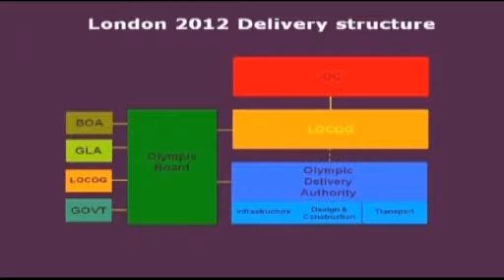The oversight of LOCOG and the ODA is by the Olympic Board. Its members include government ministers from the DCMS, Department for Culture, Media and Sport, as well as Seb Coe, the Mayor of London, and Lord Moynihan, who represents the British Olympic Association. In summary, LOCOG put on the show, we build the theatre, and the BOA provide the British team, and we act as hosts to the competing countries and their athletes.

So now let's move on to the particular activities of the ODA, the body I've been involved with since 2007. We are an NDPB, a non-departmental public body, responsible to the Secretary of State at DCMS, Culture, Media and Sport. We're there to deliver the infrastructure, the venues, the athletes' village, the transport infrastructure, and to devise and implement an effective transport plan—all, of course, to time and cost, but also in a sustainable manner, and most importantly, to leave a lasting legacy.

An early decision that had to be made was the extent to which the ODA would try to do all this itself, or whether it would seek help. The decision was made that, well, we're a limited life body.

It's going to be very difficult to put together a team of 700 people to do this from scratch with no long-term future for those individuals. So the decision was made to appoint a delivery partner.

To try and ensure the overall programme, it was split into 6 phases, as shown on here. It was also described as the 2-4-1 policy.

2 years to plan it, 4 years to build, design and build, and 1 year for fit out by LOCOG and the events trials.

The early stage focused on determining the location of the various venues, their outline design, submitting a huge planning application. We submitted that largely to ourselves because the ODA had been given planning powers, something I recommend to anybody undertaking a project of this nature.

But in order to take it forward in the best of spirit, we actually created a planning committee which involved the local boroughs, and whilst we chaired it, the local boroughs had all the say that they would normally expect to have in any normal planning process.

In fact, we've never actually used the ultimate powers that we have had, and I guess that to a degree is clearly a credit to Lorraine Baldry, who's been the chair of that committee.

At the same time as that was going on, the LDA used its compulsory acquisition powers to assemble the site. So we didn't have to assemble the site, the LDA did it for us, and they had to provide compensation to approximately 100 companies, who had to be moved off to new locations.

In addition, there were 3 groups of travellers who also had to be provided with new campsites in the area, off-site. For me, that was a learning experience that shows that travellers don't like travelling.

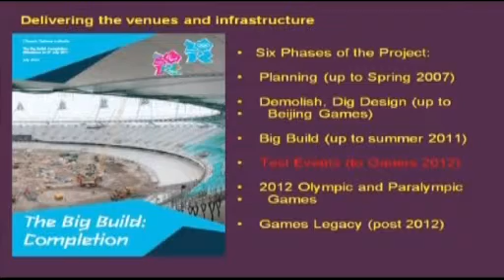This phase, 3 years, then leaving the year of planning at the end for the fourth phase of testing, and then that obviously followed by the transformation to legacy after the Games.

Engineering works really commenced in the demolish, dig and design phase, and the Stratford site, which we can see here roughly at that time, is surrounded by the Lee Navigation Canal running down the west.

You've got the A12 dual carriageway running across the top. You've got the railway line which comes out of Liverpool Street, the Eastern Line running round here, past through Stratford International Station, going round there.

You've got the Channel Tunnel Rail Link running right through the middle with Stratford International here. And not easily seen on here, but across the project, you can see one there.

There were actually 52 pylons crossing the site carrying National Grid power cables. So one of our first tasks was to actually get rid of those cables and get the whole lot out of the way and underground.

And we built 2 6-kilometre long tunnels under the park, and that project in itself was £300 million of just straightforward enabling works. The site had been used for all sorts of industrial use over a period of a couple of hundred years.

You'd had early Bakelite industry there, early plastics took place there, and more latterly, of course, you had your fridge mountains and your car breaking yards. You had some rail facilities still here, stabling yards, which we had to rebuild to the north of the site. And all this soil that you can see here was soil which came out of the tunnels of the Channel Tunnel Rail Link. So again, the site had been used simply to dump soil on it. So it was very heavily contaminated with heavy metals, petrocarbons, arsenic, and so on.

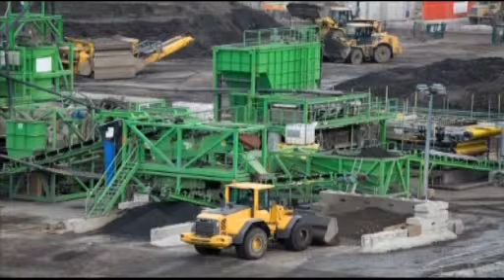And this was just one of 5 soil washing plants which were introduced to clean and recover the contaminated soil. And 2 million tonnes went through these, and we in fact recovered 95% of the soil. 5% went off to landfill. Contaminants stick to the finest grains within the soil, so you're left with a sort of cake at the end of the day, which can just go off to landfill. At peak, we had about 60 laboratory technicians just testing hundreds of samples every day. But the result was that we were able to reuse all that material for backfill, drainage, embankments, and so on.

I mentioned 200 buildings which were on the site earlier. They all were demolished, and again we recovered and recycled 90% of the material there, some of which then went into the construction phase, such as lots of granite curbstones and hardcore brick slabs, and other buildings which were actually taken down piece by piece and sold and shipped off to other locations.

The River Lee runs right through the centre of the park and clearly had the potential to be a key attraction. However, it's tidal, and at low tide you expose the mud banks, and of course in amongst the mud banks you had the shopping trolleys, the old bikes and everything else. And indeed one day they found the remains of a car. Inside the car was a safe. So much excitement whilst the oxyacetylene was delivered, and the safe was cut open to find nothing inside it.

A whole series of bridges, 35 bridges have been built across the site. Mostly they are composite steel concrete deck structures, but quite a lot have been built in two parts. And here you can see very much the two parts of the bridge, a permanent part and a temporary part. In fact, if I get this the right way around, I'm pretty sure that the permanent one is this one.

And this one here gets lifted out after the games because we just don't need bridges that wide in legacy use. You do need them for the massive number of people which are in the park during the games. So all of these bridges pretty well are built in two parts.

So let's now have a look at some of the stadia. And of course, a starting point for any games is to determine the extent to which the existing facilities that you have in the country or in the city can be used. To the extent that they're not suitable, then the next decision is, should we build a temporary venue? Or is there justification for a new permanent venue? And that decision process went through for each and every venue.

The main stadium was a significant challenge in this respect. You need 80,000 capacity for the opening ceremony and for the main athletics events. For the UK, 80,000 seats, that's only going to be of interest for a national football stadium or for one or two of the Premiership clubs who can utilise a capacity like that.

Wembley could have been adopted. Many people say, why didn't we go to Wembley? And fundamentally, security and transport, moving hundreds of athletes up to Wembley and back each day, separating them from the main Olympic village and park, basically made that a non-starter.

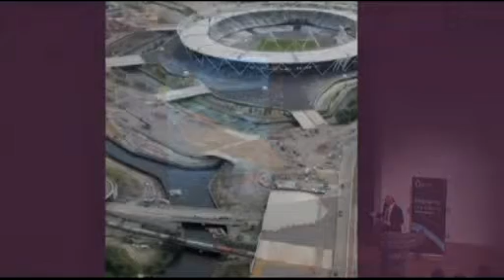So a decision was made in 2007, probably for the first time, we think, that we would build an 80,000 seat stadium for the Games, which could then be demounted to a 25,000 seat facility, so reducing the risk of having a white elephant after the Games. We used the natural fall of the land at this end of the stadium. We basically went in at ground level and we just used the land to put in a 25,000 seat lower bowl, and then above that we put in the extra 55,000.

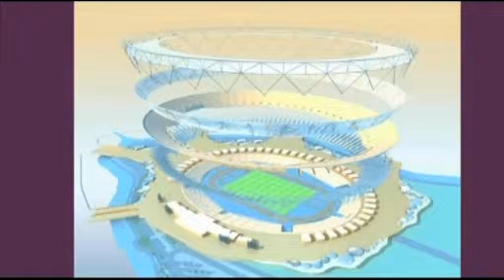And here you can see the stadium blown up. You've got this lower bowl of 25,000 seats. You've then got 55,000 seats contained in a structural steel frame, and then separately another structure holds up the roof here. These tubular steel beams we've got around the top, those are recovered gas main pipes from a project which ordered too many gas main pipes. So that was quite handy.

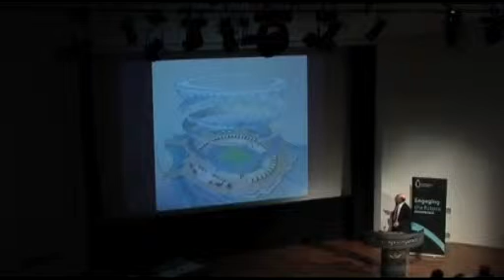The torsional ring on the inside here, which holds up the inside of the fabric roof, is also stressed to 1,200 tons, and that is capable of carrying, and is carrying, 34 14-ton lighting towers on top of it. The bolted steel structure can just be very easily assembled and dismantled.

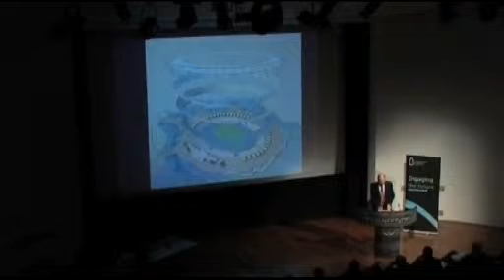Although, of course, since its completion, when Gordon Brown came to visit us, he walked across the bridge onto the stadium, and his first words to me were, "You're not going to take this down, are you?" And now, of course, we've got various football clubs, or have had, fighting over its use in Legacy, and almost certainly at the moment, I suspect, it will not come down.

We've now won the 2017 World Athletics Championships, although you don't need 80,000 for that. But that certainly has assured the future of the stadium, and almost certainly now I think it will be somewhere between 60 and 80,000 in Legacy.

There are 700 separate spaces underneath the stadium around here. One of the key things to notice here is that in trying to make it very simple as a structure, these, what I call the Smarties, around the perimeter here, are actually the sort of retail and catering units that normally you would have inside a stadium. We pulled all of that out in order to make the stadium as simple as possible. So these would all be temporary facilities on the concourse level around the outside of the stadium, really fundamentally driven by that desire for simplicity.

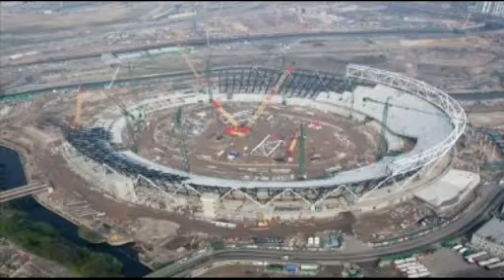I think that's it during construction, which shows it very clearly. The steel frame, and precast concrete going on for the seating. You can see the structure for the roof separate, so the white steel basically separate from the black, and it went extremely well as a facility. And then you can see the lighting towers which have been put on the torsion ring on the inside.

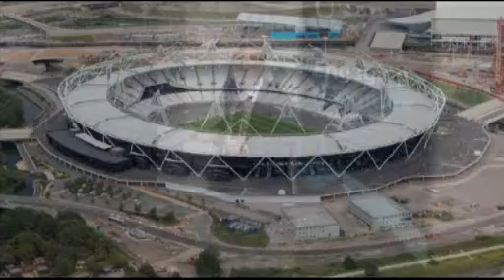The zigzag design here is a sort of breakdown of the Olympic logo with its sort of haphazard shapes, if you like, and you can see they've even tried to follow that through in the alignment of the asphalt on the outside. The IOC, of course, always get something different, so they've got their box here, which is basically the hospitality suite for the IOC and the officials from around the world. So that's the main stadium.

The aquatic centre featured at bid stage as an example of what we could do in terms of iconic buildings for the Games. And so an iconic design by Zaha Hadid was introduced to the bid document to capture the imagination. The great thing about iconic designs by iconic architects is that some poor bugger's got to then build it. And this one was no exception.

So post-award, it was realised that what was designed was a bit too big for legacy requirements, so it was decided to scale down the original design, and consequently the core legacy building has a capacity of 3,000 spectators, and that's increased during games time to 17,500 with the addition of two very large wings on either side. Inside it, you've got a 50-metre competition pool, a 50-metre warm-up pool, and a dive pool. It's worth remembering that there is not an Olympic dive pool in London today, so the divers go to Sheffield to train.

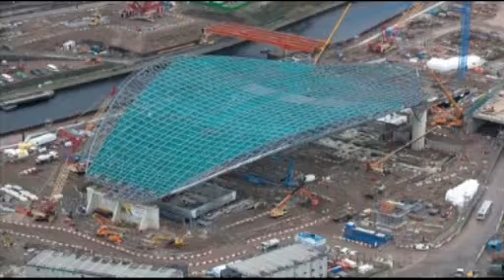But that is actually the floating end of the roof in Legacy, so that had to be fixed and built away from, with temporary stands running through to support it as it was bolted together. It's a bolted structure. And then once it was finished, we had to jack the whole thing up in the air to put the sliding bearings in under here, and at the same time remove the temporary support. So that was an anxious moment. It was done on a Saturday and Sunday when nobody was around. I stayed at home and simply suggested that the design engineer should sit under it whilst it was being done.

But it settled to within just a few millimetres. It was all done with a laptop. So a laptop controlling all these jacks, lifting the whole thing up, and then on the laptop they could see 200 points around that roof and what position each of those 200 points was taking up. And it took up all the positions to within a few mil of what had been designed. So an enormous credit to the designers who, not surprisingly, were Ove Arup.

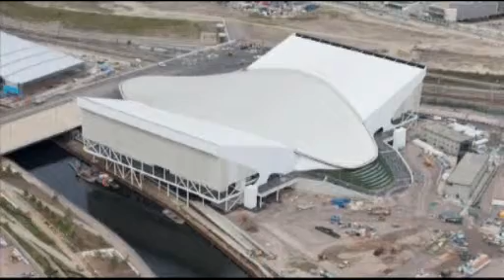I mentioned the two temporary wings, and you can see them in all their glory here, not adding a great deal to the iconic design, it must be said. But in each of these, you've got 7,500 seats, and those are totally temporary. They're just a heavy steel frame wrapped in PVC, and they are taken away after the games, and those are then replaced by... that's the interior. I forgot I put that one in.

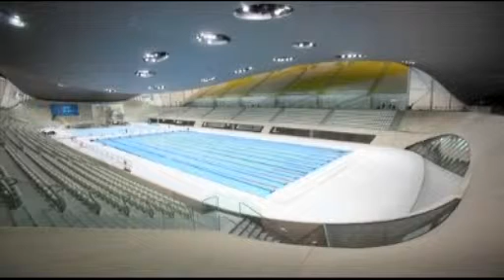You can see again the scale of the roof here. It is very, very dramatic, and there's no doubt about that. Here are the temporary wings going away to either side. So the legacy seating is the seating through here. You've got a 50-metre pool, dive pool. Zaha designed the diving boards, and if anybody's seen the advert for the taps that she's designed, not so dissimilar. More reinforcement than concrete in those.

And the floor of the pool goes up and down, from 3 metres deep up to 0. So you can vary it in legacy for different use for people with disability or school children. And then the end boom here, which obviously has to be pretty accurately positioned for the main races, can actually be trundled along, and you can create two 25-metre pools, or indeed a 35-metre pool if you want to use it for water polo. And through this glass wall here, and under what is the main access bridge to the park, integrated with it is another 50-metre pool, which is the training pool.

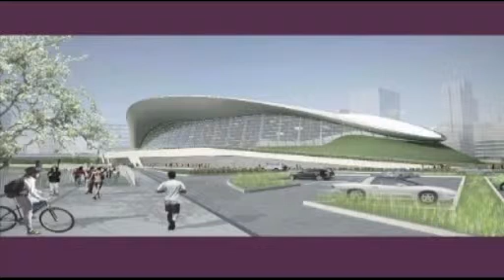And then from the outside in legacy, temporary wings come off, and then this glass wall goes the full length of the centre, and that actually is basically cantilevered off the bottom and just floats at the top here, because the movement in this lot, as you can imagine, is enormous. It floats around by about 300 mil at the end here. And so you can't fix this glass to it. So the glass just is floating in a baffle at the top. So quite a challenging building.

Next, the velodrome. The velodrome in Manchester, built for the Commonwealth Games, has been enormously successful since the Commonwealth Games. It's used 24/7. And so it was a pretty easy decision that, given that London has not got a velodrome, we would build a permanent new velodrome in London with its indoor track. It's a 6,000-seat stadium. It is the most energy-efficient building that we've designed and built. Totally contrary to this one, we didn't start off with our iconic design and then wonder how we were going to build it and design it. There we had a totally integrated team of architect, engineer, services engineer, contractor working together right from day one.

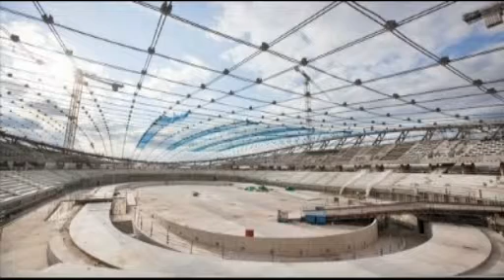We've achieved a 31% improvement over 2006 building regs. It's an extremely compact design. We've reduced as far as possible the overall volume to bring down the amount of air which has to be handled. We use natural ventilation and we use natural light on the building. And this shows you the roof, which originally was going to be a structural steel roof, and then again, as part of the review of the design as we went along, it was decided to have this cable net structure, which weighs about 100 tons compared with the 1,000 tons that the structural steel roof was going to weigh. So again, you just save weight right the way through the building, because everything becomes lighter.

That's the indoors now as it's finished. The track is Siberian pine, and that is just a series of 2-metre-long, 40 mil square timbers, which are just nailed down. So a host of joiners just nailing down the track to a timber subframe behind it. You can see the degree of natural light which is coming through the roof lights, and then we've got a glass curtain wall which goes right the way around the perimeter. Fantastic. You don't really need any lights on there at all, and it is a very, very light arena.

Along come the broadcasters, and they don't like natural light. So for the games, we've got to black all of that out and switch on an enormous number of artificial lights, because that's what they want for high-definition television, slow-motion replays, and everything else. So in legacy, we won't use much electricity. During the games, we'll use an awful lot.

Chris Hoy acted as a consultant to us whilst we were designing it. One of the things which worries the cyclists is that when they go around the end here, traditionally, the spectators are very much banked down the side here, so it all goes quiet, and they feel they're not being urged on sufficiently. And so with Chris's help, we took the seating right the way around the end of the wall here, so that they've got people actually looking down and shouting at them as they go around the end.

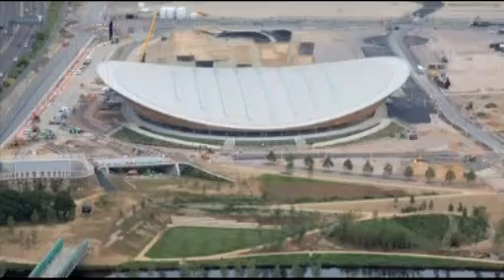Here you've got the BMX track, which within these four walls, I will say, since the trial, we've had a few problems with. We discovered that the designer was actually designing it as he went along, notwithstanding that he was the world's best BMX track designer. So we're now having to make some adjustments to the earthworks there. But that will stay in Legacy.

There'll also be, going around and around the park here, a 1-mile road racing circuit, and in the park around here they're going to somehow fit in a mountain biking circuit. So after the games, every type of cyclist will be catered for, and the whole thing is going to be run by the Lee Valley Regional Park Authority.

Next to the velodrome is the 12,000-seat basketball arena. There is no economic case for a stadium of that size in this part of London, in Legacy. The existing facilities didn't meet Olympic standards, which always seem to be different to every other standard, or they had transport and security issues, and so it was decided to build a temporary stadium. And this is it.

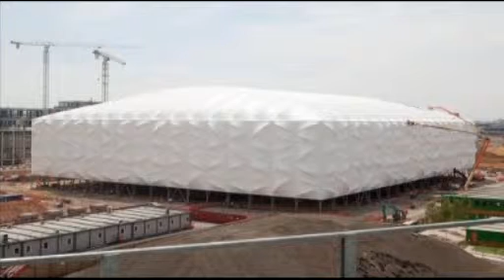It's just a very large portal frame structure with a PVC covering and demountable seating, which is hired on the inside. All of our buildings sit on piled foundations, but because this one was temporary, we've actually built it on stone columns so that anybody coming along afterwards can actually dig those out quite easily if they need to.

The structure is owned by the contractor who built it. And so the deal was, give us a price and then give us a discount because you can own it. And aren't you lucky? And take it away for potential use elsewhere. So if any of you are planning a large wedding, Barr of Scotland will be pleased to help you.

There's also a water polo stadium next to the aquatics that again is being built as a temporary structure. It's 6,000 seats. There, an interesting factor was that when we came to design the pool for the water polo, it was cheaper to design it, build it and demolish it in concrete than it was to actually hire in a big steel tank. But in fact we went down the steel tank route because that just seemed to be more sustainable and clearly could be used and hopefully passed on to others afterwards.

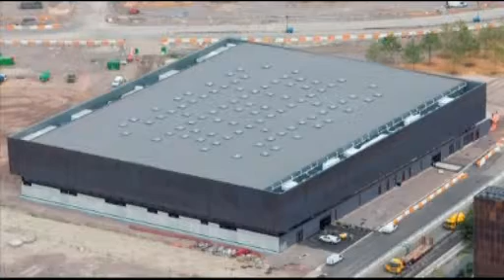Our other permanent structure on the park is the handball arena. And this is a 7,000 seat arena. It's a simple box structure, structural steel and concrete, very similar in concept to the Velo, with these light pipes which let natural light down through the roof, and then a glass wall which runs all the way around the perimeter, letting light in here.

This is copper, and in fact, according to the weather, you just get totally different colours to this building. As the sun goes down, it looks absolutely fantastic, but it's a very attractive building, and in Legacy will become a sports community hall, basically, because handball we don't do in the UK, so we've designed it on the inside so that it's very adaptable, and this seating is all retractable and can be pushed right back against the walls so that we can increase the floor area in here, and the idea is it can just be used as a multi-sport facility by the community in Legacy.

What look like spotlights, this is all natural light coming down through the light tubes. You can see the curtain wall around the back here. Again, we've now had to put baffles in the light tubes so that we can shut off the light for the broadcasters during the games.

The biggest building that we've got on the park is the International Broadcasting Centre. 20,000 journalists, if you recall, and the broadcasters are all in here, 280 metres long, 90 metres wide, 30 high, two-storey building inside, and really just a series of very large open spaces, which the broadcasters then bring their modularised studios into.

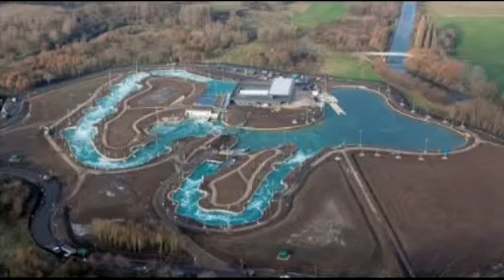Now, not everything takes place on the Olympic Park. Up at Broxbourne, about half an hour away, we've built a whitewater canoe centre. This is now open to the public for whitewater rafting or kayaking. So if you're feeling like you want an exciting weekend, that's open. In fact, the River Lee is over here, so it's again connected in many ways directly to the park.

Down at Weymouth, we've got the National Sailing Academy, and they've had their marina expanded by us, and they're hosting the sailing. Out at Eton Dorney, you've got the rowing, and we've done stuff there to improve that facility.

And then Eton, of course, the school come along afterwards and say, well, this is wonderful, but now it's going to cost us more to maintain it afterwards, so please can we have some money to maintain all the improvements you've given us. And Boris, of course, by this time is in control, so he says, I went to Eton, I'll go and sort them out. We finished up giving them £1 million.

Over at Woolwich Barracks, we're currently building three large white venues, which are quite fancy, for the shooting. And two of those, I'm pleased to say, are going to go up to Glasgow for the Commonwealth Games for the shooting events up there, so they're temporary again.

Mountain biking is in that hilly county of Essex. They managed to find one out at Hadleigh Farm, and so that's where mountain biking is taking place. You can imagine why not at Fort William, where there's an international one, or in Wales, but it was all to do with transport and security and the desire to keep things focused on London.

Just on the other side of the A12, at the north of the park, is what's called Eton Manor. And on Eton Manor, we've got a whole series of sports facilities which are a mixture of facilities for the athletes, for their pleasure and training. There are three swimming pools there, three 50-metre swimming pools, temporary ones, for the athletes, together with tennis courts and a permanent hockey stadium.

How could we actually weave our priority themes through the procurement process? How could we meet those themes whilst trying to ensure we kept within budget and obviously also kept on programme? So we finished up with what was the ODA procurement policy.

It focused on best value, not on cost. Clearly you had to be able to build it on time, but after that it was a mixture of cost alongside how good were you going to be, what were you going to be doing on the safety front, on the sustainability front, on the employment of disabled people, the employment of ethnic minorities - how are you going to handle all sorts of issues other than just cost and programme.

And then the whole lot was judged on a balanced scorecard, and we actually used people outside of the ODA team to run through all these and then feed in their assessment on the balanced scorecard of the various bids which we received.

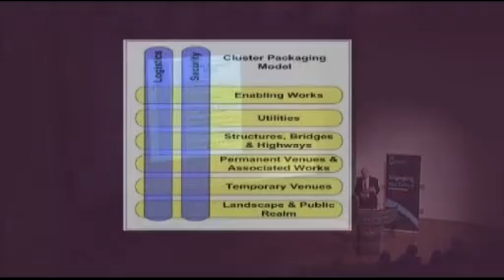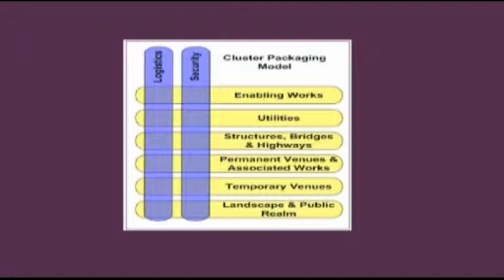We then packaged the jobs up in clusters so that wherever we were, we had these basic clusters of enabling works, utilities, structures, permanent venues, temporary venues, landscape, and then logistics and security running as common themes through all of those different projects.

The next stage was to say, well, what basis are these contracts going to be on? We used the NEC3 form of contract, because it requires early notification of problems by contractors to the client, so it's a pretty transparent approach. We used design and build, so in each case, having selected the architect and got the basic design understood with the architect, we would pass it across to the contractors to give us a design and build price.

We said, let's have a target price rather than a fixed price, and we will share the risk with you on whether you undershoot or overshoot that target price. So the target price was critical, that's where the real negotiation took place. Having agreed that, it was a 50-50 saving - we shared 50p in the pound with the contractors on the undershoot, and if they went over, the risk was limited to the contractor, and we picked up most of the risk on the overshoot. Fundamentally what you want to do is motivate the contractor to look at every way he can to keep the cost down, because he's then going to share in those savings.

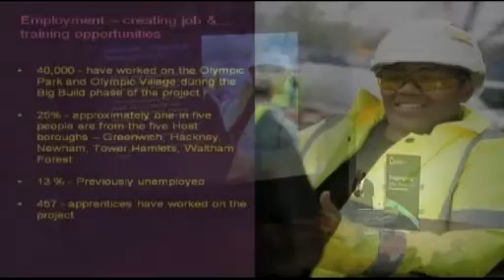If I can just return quickly to the key themes I mentioned - here you've got some figures on the employment and skills theme, looking to take people out of unemployment. We achieved 13%, over 400 apprentices employed. There was a lot of pressure to employ local people - 25% were local, and 40,000 have been through the park in total.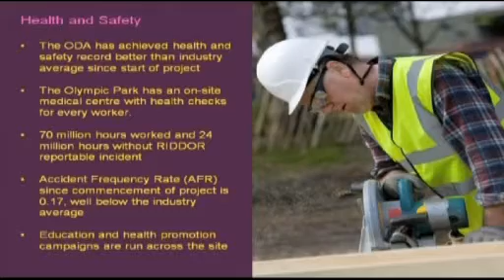And then if you look at health and safety, we haven't had a fatal accident so far, and we've kept a very low accident frequency rate. When people ask what worries me going forward, it's this more than anything else, because as we get to the end, you run the risk of people being that much more careless, and a fatal accident is a very easy thing to happen, particularly where we've got so many vehicles running around, and we've still got work going on at height.

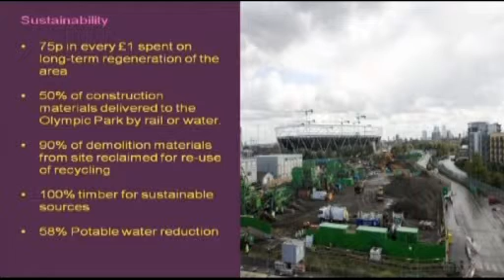And then sustainability - these are just some of the issues. We created a timber panel so we told the contractors who they were going to get their timber from, having identified sustainable sources. We also provided the cements and aggregates to the contractors so we could get it in by rail rather than in a haphazard way. We set ourselves a target of 50% of materials coming by rail, and we've achieved about 60% - relatively easy given we had a jolly great big Bow East rail depot on the corner of the site. It would have been a different story if we hadn't had rail so immediately adjacent to the park. And 75p in every pound we've spent, we're pretty sure is still going to be there in 100 years' time, so a very sustainable expenditure.

In addition to these three, as I said earlier, we had targets set for us by the government on equality, diversity, and inclusion, and it does work. There's no doubt that if you make it very clear you want to achieve these objectives in addition to just building something, set it out from the beginning, and as the client constantly monitor and manage it, you can actually achieve significant change through the supply chain. I think that's one of the things we've learnt from this.

So where are we today? Well, the infrastructure for the Games is now 94% complete. It's on time, it's under budget. Why is that the case?

Well, I would say cross-party political support we've had right from the beginning. There's nothing like a fixed deadline to focus people. We've had a sensible budget. There was a lot of argy-bargy about the budget at the beginning. We finished up with a sensible one, and that makes a big difference, I think, to the quality of your

decision-making. We, as the client, have tried to be very clear in providing leadership and a very, very rigorous approach to program control and change management. We literally would just refuse to acknowledge change. We'd give way occasionally, but by and large, we just said, right, as we stage-gated our way through the program, no more change from particular points.